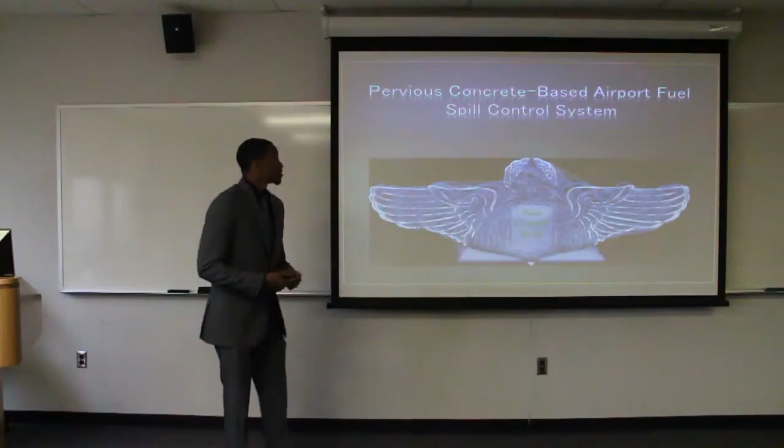Good afternoon, everyone. We're Team Greenberg, and we designed a pervious concrete-based airport fuel spill control system.

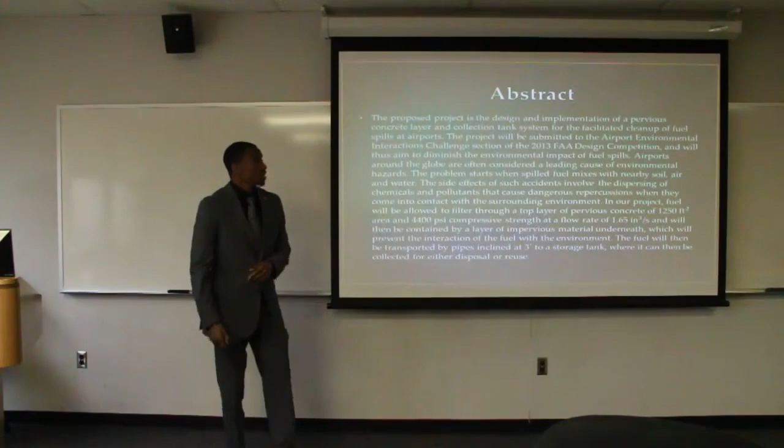We're motivated to do this project by a couple of things. Fuel spills are a major concern at airports because fuel is highly dangerous to the environment, and there are hazards when you think about seepage through concrete. If fuel gets into the water, it can be dangerous to your drinking supply. Fuel is also highly flammable, so it can explode.

Our project contains the fuel in a safe and economical manner, and our goal is to increase the safety of the passengers and also reduce delays.

Before we start designing, we had to think about a couple things. The strength of our concrete is based off the load of the plane. Depending on the load, we get the strength. Our mix also depends on the strength we need, and using the strength in the mix, we begin our design.

After design, we begin testing. We have to test for compression strength and permeability. If those numbers are good, we go right into completion and implementation. But if they're bad, they have to go through the system again until we get the numbers we need.

Also, for our pipe design, we needed materials that were strong enough for our design but also environmentally friendly. And we needed the pipes to be big enough to handle the flow coming through our system.

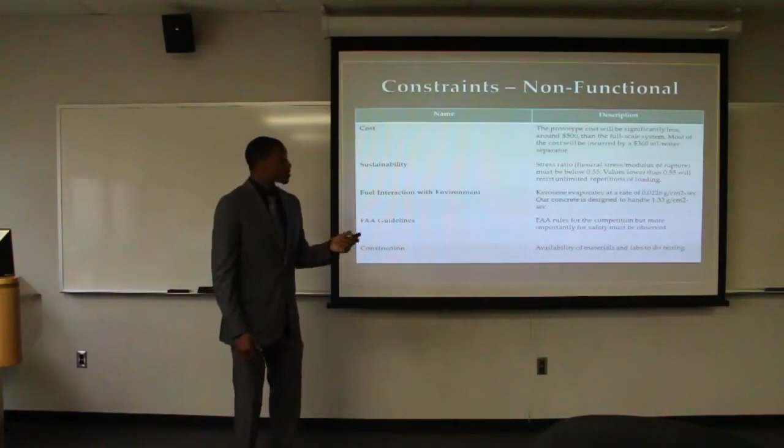We followed the FAA guidelines. In construction, we just used materials available to us, and we got into the lab when we could, though sometimes that was time restricted.

There were a lot of risks we ran into designing this project: evaporation, seepage, and absorption, like I said before. If fuel gets into the environment, it becomes very dangerous on many levels, so we looked to avoid that.

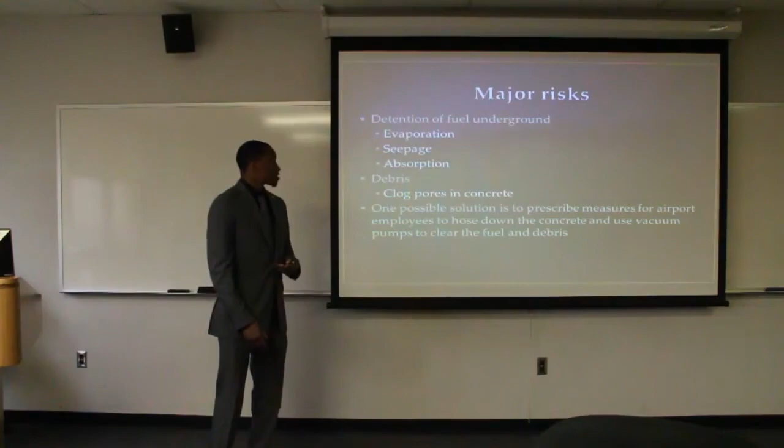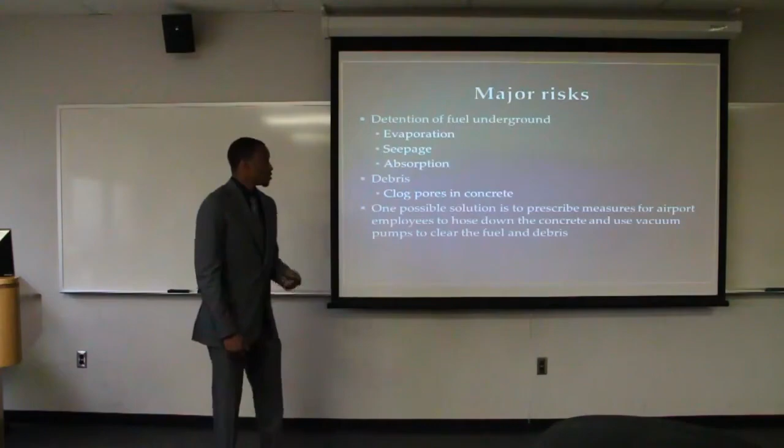Debris is also a concern since the airport is outside — there's going to be leaves and dirt, so it's not easy to keep it completely clean. But we had a method to prescribe to the airports: maybe the people who clean the grounds could hose down the concrete and use vacuum pumps to clear the fuel, making sure our concrete isn't clogged up.

Here it is, this is basically it right here. The concrete here, as you can see, is this tray. It's 50 by 25, and this is the first concrete layer, 12 inches thick.

Below the concrete is the aggregate, which is where the liquid will run through, at a 5-degree slope. It all meets right here at the orifice, the beginning of our pipe system, and the orifice runs the whole length of the concrete. After it goes through the orifice, it comes out and the pipe goes down 100 feet at a 1 degree slope, so that's a 1 foot drop right there. That goes into our oil water separator, where the oil is separated from the water.

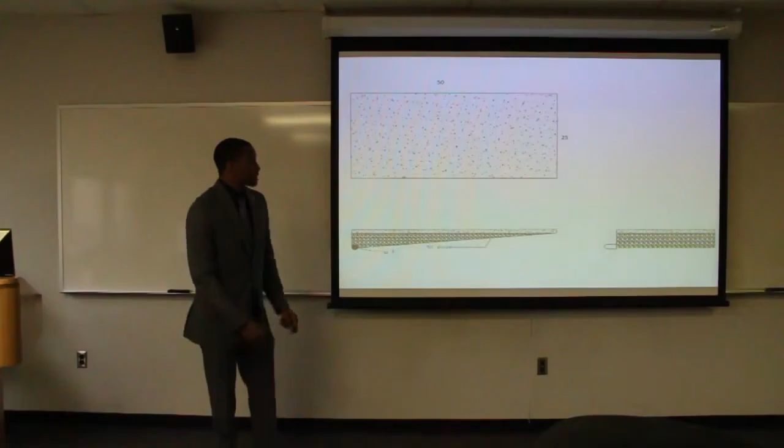There's basic numbers for the weights of the things that we use for our project. We got a total unit weight of 2,185.2, which is a little lower than the average, which is around 2,400. But we had to take into consideration the amount of air holes that we have for the permeability, so we lose some type of weight.

Based upon the AC ratio and the water content, the AC ratio needed to be between about 4 or 5, and the water content around 30%. So based off those numbers, we get a permeability of 27.04 centimeters cubed per second, which is fairly good for the goals that we needed.

Now, to design the slab, we had to use the 53,000 maximum takeoff weight. We also used 150 PCI for our K, our spring value for the soil, which is the average found around that area at the Philadelphia Airport.

Now, to find our working stress, we used the modulus of rupture over the safety factor. And finding our modulus of rupture, we used our K prime, which is 8, the usual number at airports, and we multiplied that by the square root of our compressive strength, which is 4,400, and we got 530.66.

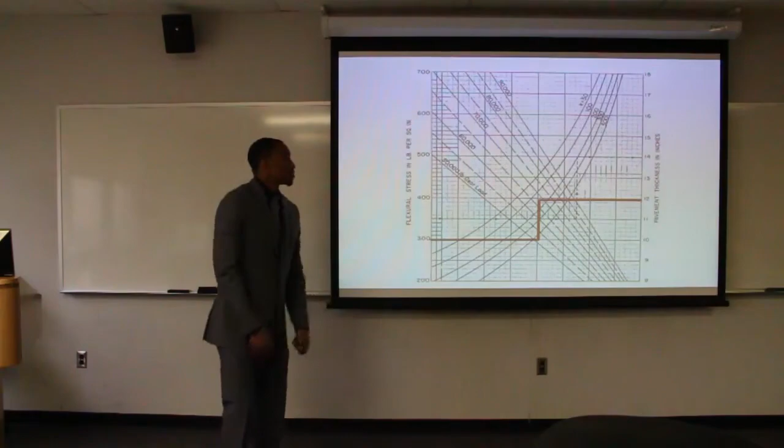So that works out. Here's just a graph of the numbers. We start here at 300, which is our flexural strength. We go horizontally till we run into our 53,000 pound gear load, back up vertically to our K, 150, so that's between 100 and 200, then back horizontally to the 12-inch thickness of our pavement.

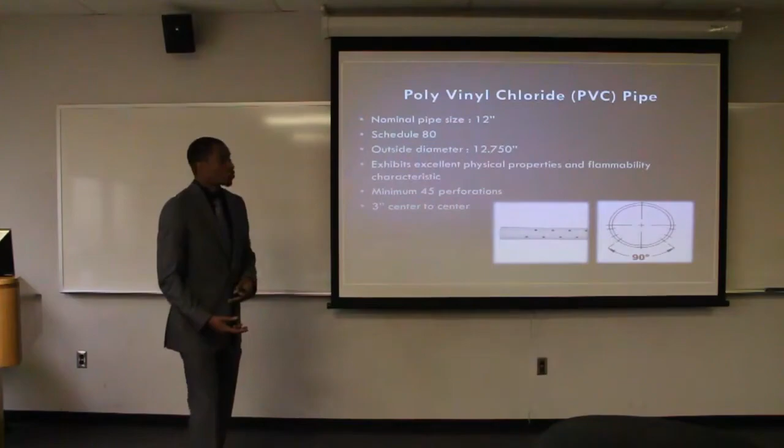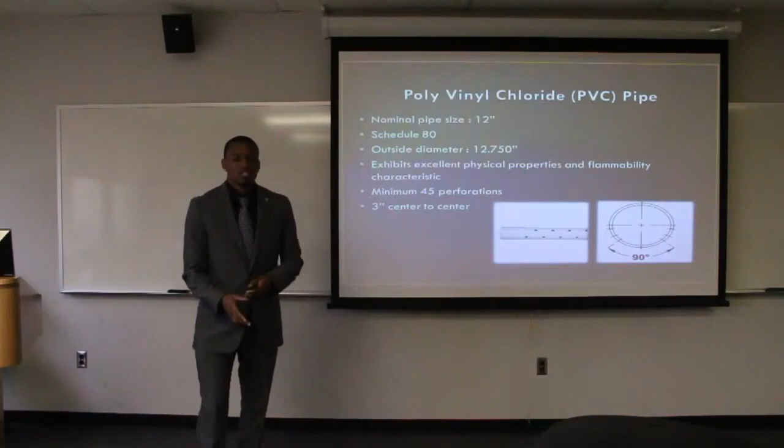Now for our pipe system, we use PVC pipes because they have really good physical properties. They're really strong, and the flammability characteristics are pretty good, and the walls are pretty thick. So we calculated that we need a minimum of 45 perforations to get the flow rate that we needed. What we did is we used 2 sets of perforations, 90 degrees apart, and 3 inches from center to center.

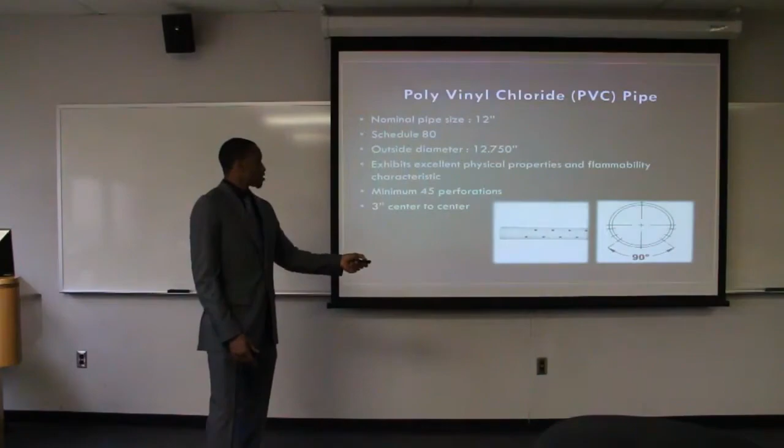Now, calculating our flow rate, we needed our outflow rate, the flow rate of our water, to be greater than the inflow that the pipe was going to handle. So we used a number of equations, Bernoulli's, the Darcy-Weisbach equation, and calculated our velocity for the water here, using a number of heights.

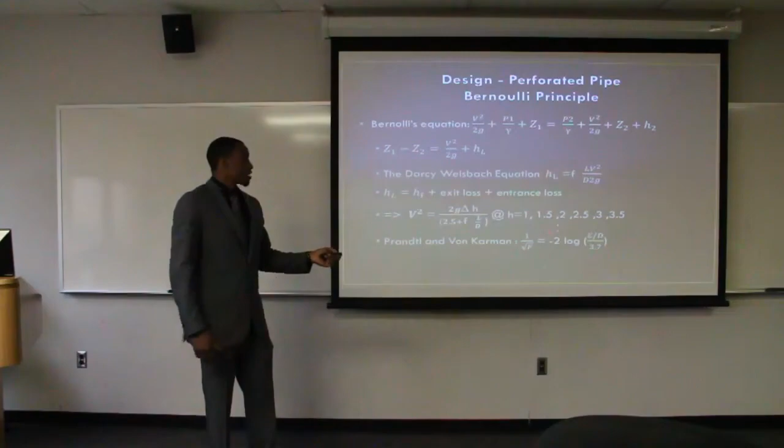Now we start at 1, because that's the height of the total pipe system. We have the 100-foot pipe at the 1 degree slope, at the 1% slope, so that's 1 foot height, so we're beginning at the 1 that's already covered. And then we go from every height up there, 1.5, 2, 2.5, 3, and 3.5, and that's the height of the aggregate, so that's the maximum the water will reach in the whole system. We're basically at the very most that it can handle, but to get these numbers, we have to find our F here.

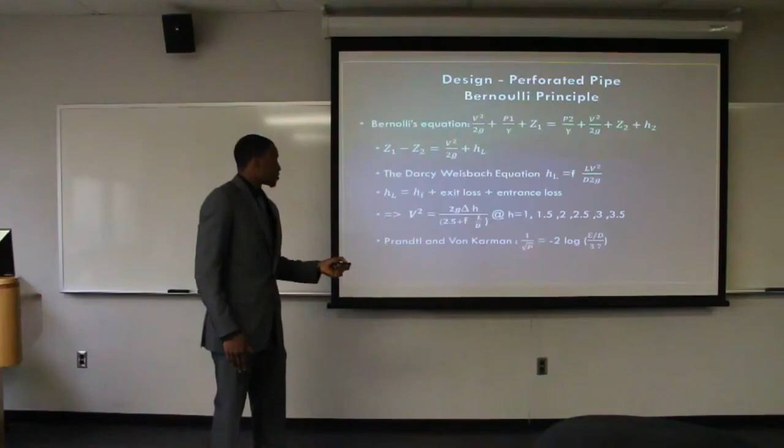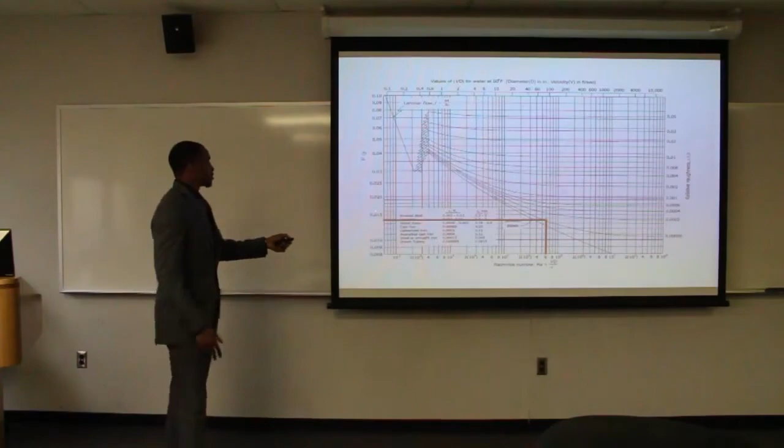Now to find F, we use Moody's diagram. You have to end up over here. But we begin with our Reynolds number, which we calculate using the VD over nu equation, and we get 6 times 10 to the 6th power. Then we go up to our relative roughness, which we find to be 0.00005. Back over to the left, and we find out our F is 0.014.

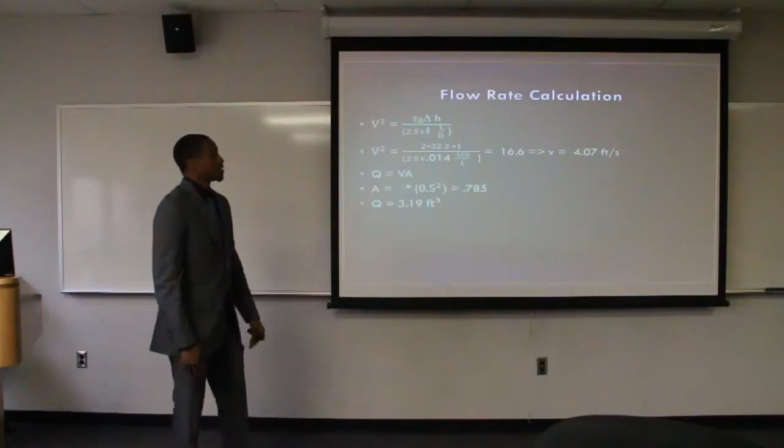Now we plug our F back into the equation, and we get a velocity of 4.07 feet per second. Multiply that by the area, which is 0.785, and we get a flow rate of 3.19 feet cubed per second. So we have a flow rate that we need to satisfy.

Now we need to make sure that our orifice can handle all the flow. So we calculate our flow rate for our orifice, using our CD and our A, which is our coefficient of discharge and our area. We find that with approximately 45 perforations, we can handle 3.34 feet cubed per second, which is higher than the 3.19. So we've met our goals.

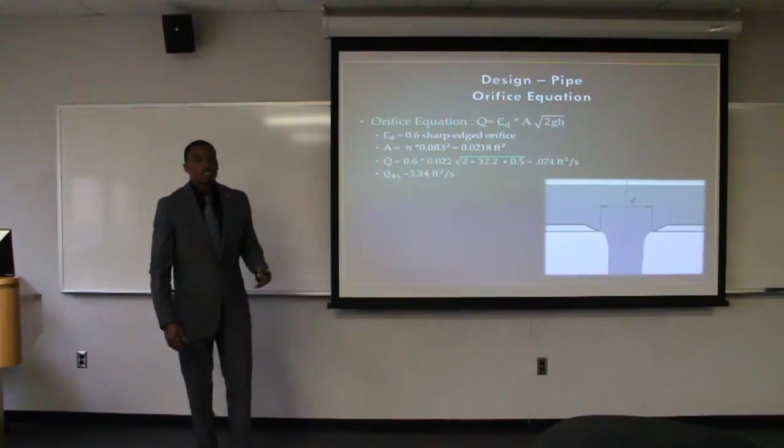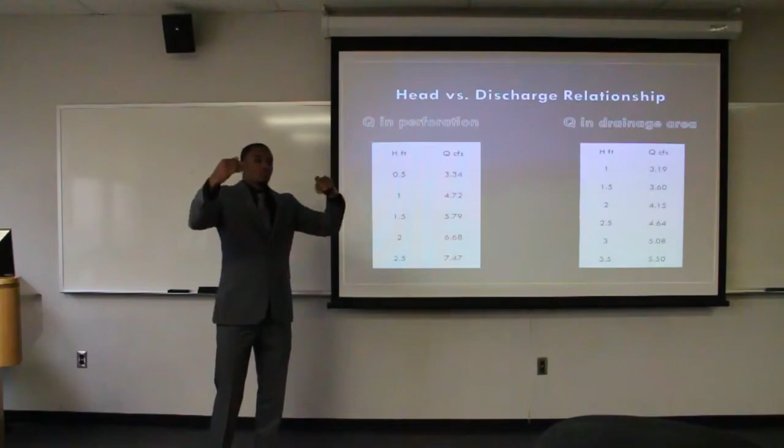This is just to describe the relationship between the two. Now, the Q in, the flow in the perforation, is strictly the flow of the system into the pipe system - the flow into the beginning of the pipe. So we start at 0.5 from where the pipe begins before it flows down to the oil water separator, and so we get from every height that flow. So this is all the water that would be in the aggregate.

Now the Q in the drainage area is the water in the aggregate plus the water flowing down through the pipe. So we begin at 1 again to come up to that 1 foot height of the pipe system. And you can see here clearly that the Q in the perforation, which is the flow from the aggregate into the pipe system, will always be higher than the Q in the drainage area.

Now for our concrete, we had a test - we had many tests actually. For our 7th-day test, we got a mean strength of 3,086.67 psi. So we use that number to calculate what our expected strength on the 28th day would be, which is 4,387.48. And we're looking for 4,400, so that's around it.

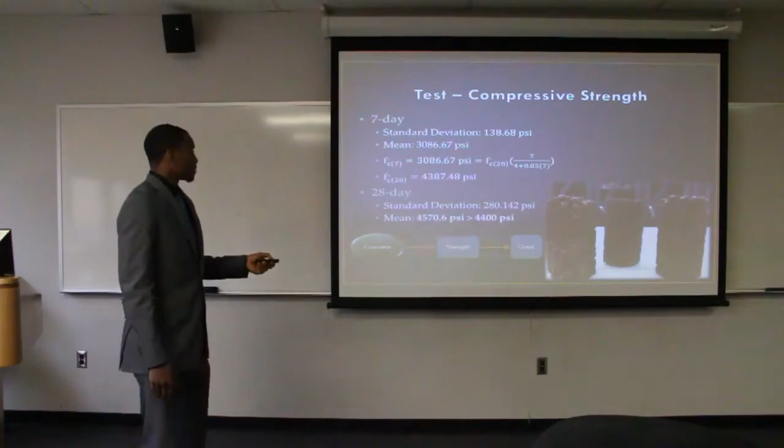Now, well, this is great pouring technique, just want to point that out. That's great. Permeability aggregate here - so we're testing for the permeability of our aggregate.

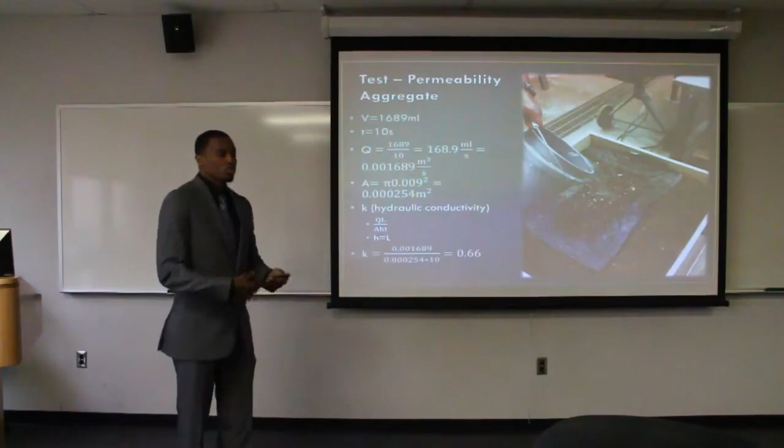So we need to find our K, which is our hydraulic conductivity, which is basically how much water flows through a material. So we find our K to be 0.66, which is good.

Now, testing for absorption. This was also important because we wanted to make sure that things weren't getting absorbed in our system. We want to make sure that everything flows through and finds its way into the oil water separator. So we didn't want anything to be absorbed in the aggregate, like the fuel or the water, to possibly have it go into the soil or go into the air. So we wanted to avoid as much evaporation or absorption as possible.

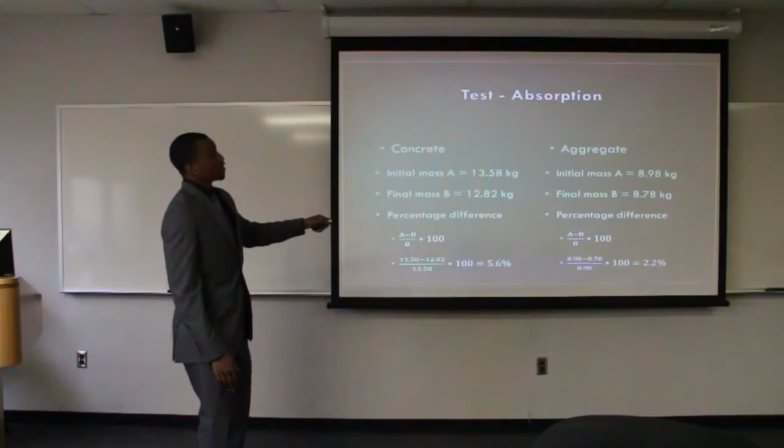So for our concrete, we get a 5.6% absorption rate, and for our aggregate, we get 2.2%. Those are fairly low percentages, so we're good on the absorption part.

Now we had to test the system. Once you make a system and it doesn't work, we've done all that work for nothing. So we had to test the whole system to make sure that the water that ran through our system was drinkable and usable. What we did here is we used 2 liters of tap water mixed with about 300 milliliters of alcoholic solution, which is basically rubbing alcohol.

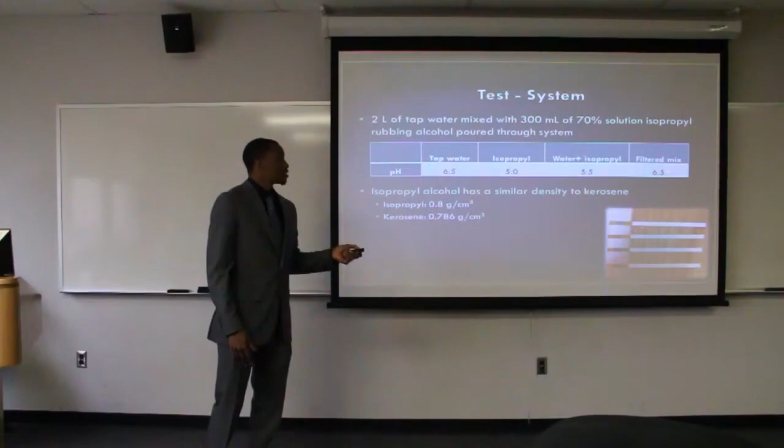We found that the pH of the tap water is 6.5. The pH of the isopropyl, which is the alcohol, is 5.0. We even mixed both of them and found the pH of that, which is 5.5. After running our fluid through our whole system, we get 6.5 pH for our filtered water, which is the same as tap water, which means you can drink that. I don't drink tap water, but if you want to drink that, you can drink it. So it's drinkable.

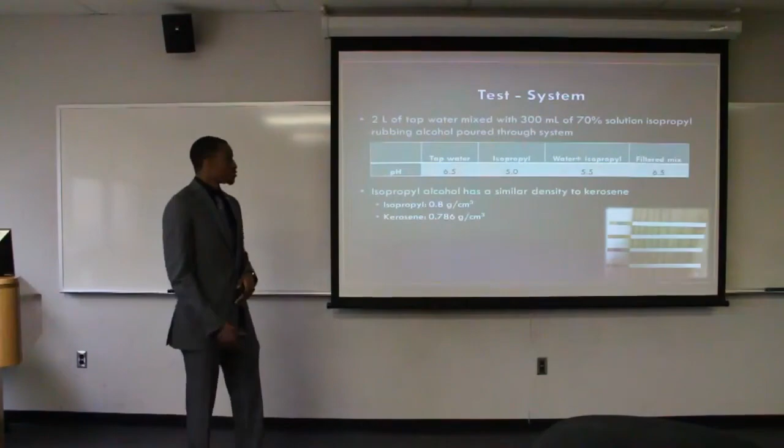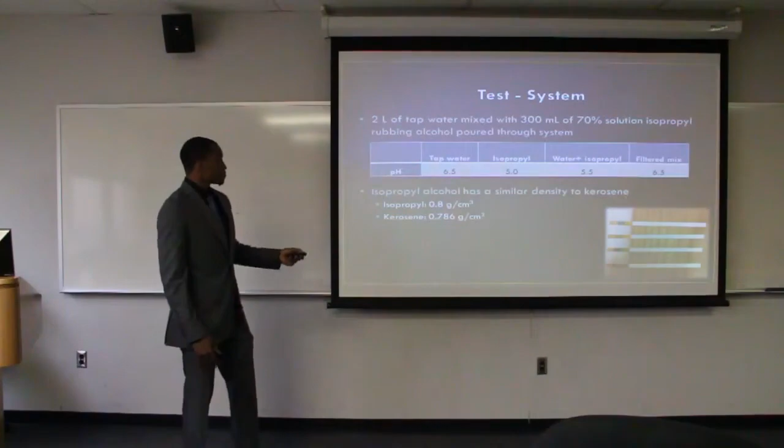Also, the testing is based off density. So we had to use something that was very similar to kerosene, which is the main component of the fuel at the airports. So this is 0.7, 0.8, right around there. So pretty good.

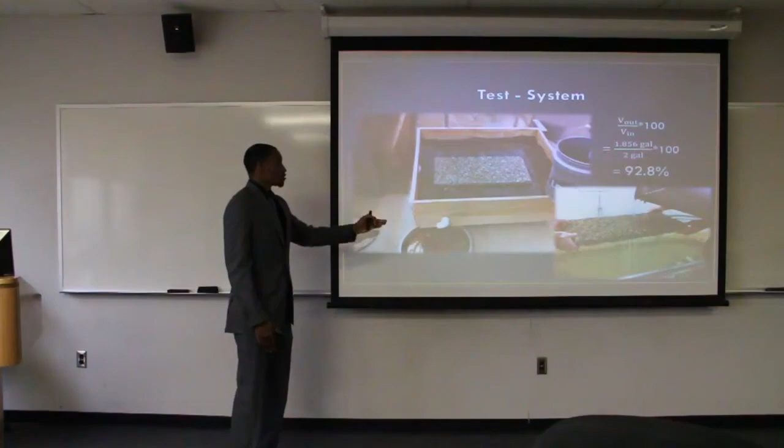We ran a number of tests and we got an average of 92.8% retained from running it through the system. That's a fairly high percentage. The 7.2% could be due to water that's left over, or it could be the minimum absorption of the aggregate or even the concrete.

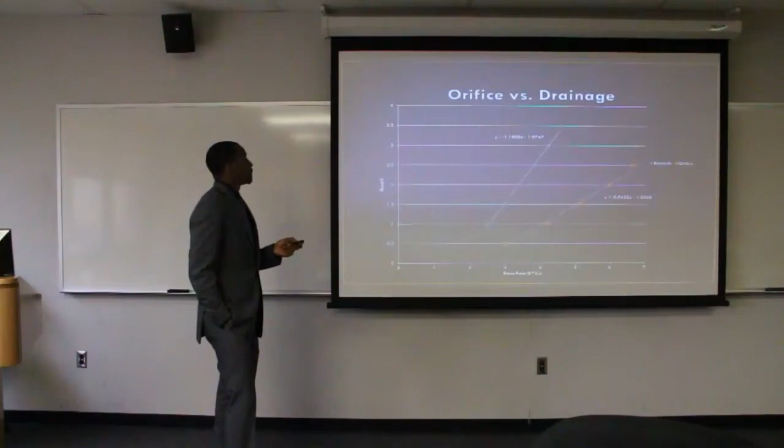Can you help me understand something a little bit? When you were talking about the safety factor and modulus of rupture, can you pull that up and just explain that a little bit? I can do that, I can certainly do that. That's it? No, that's not it. This is it.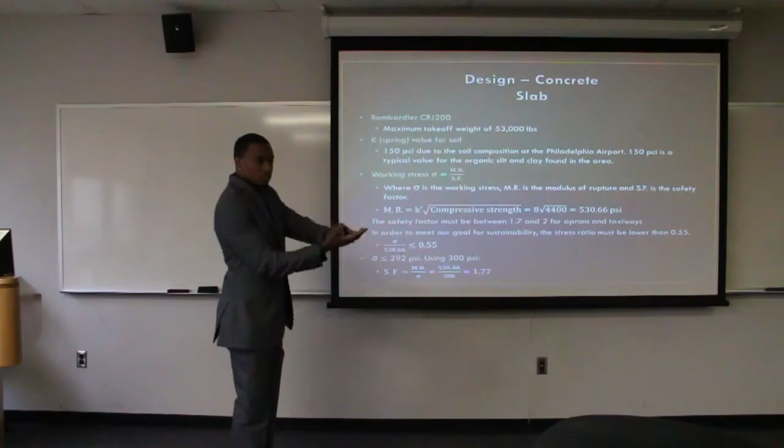I guess what is spring value? What does that mean? The spring value, that's how much spring of the soil. Explain, I don't understand that. What do you mean? It's like the compactness of the soil, like soil's compact or it's loose. So it's got a value of 150, what's PCI? It's pounds per cubic inch? Yes, PCI, pounds per cubic inch.

So I don't understand how that relates to springiness or flexibility or compaction. It's the pounds per cubic inch, which is how much pressure it can withstand without... of course, okay. So you've got your working stress, which is the modulus of rupture over the safety factor. Right, you calculate a modulus of rupture as what's K prime?

Spring value is the prime. That's the 8, the 8 that we use. What does that, I don't know, what's the definition of K prime? It's the prime of the spring value. So how do you go from 150 to 8? Because that's the number that we had used for the equation. Okay, do you know where that number came from? Yeah, that's the number that's found at most airports. We found it in the book.

It's in the references. So you got your modulus of rupture, and you decided that the 0.55, what is that value again? That's our stress ratio, can't be any higher than 0.55. It's one of our constraints.

I guess this is what I'm confusing on. You say the stress ratio, it says working stress sigma is equal to MR over SF. And then you say sigma over 530 has to be less than 0.55. No, that's the ratio. Right, so is sigma in the second equation the same as the working stress up here? Is that sigma right there? Right here. Is that the same as the sigma above?

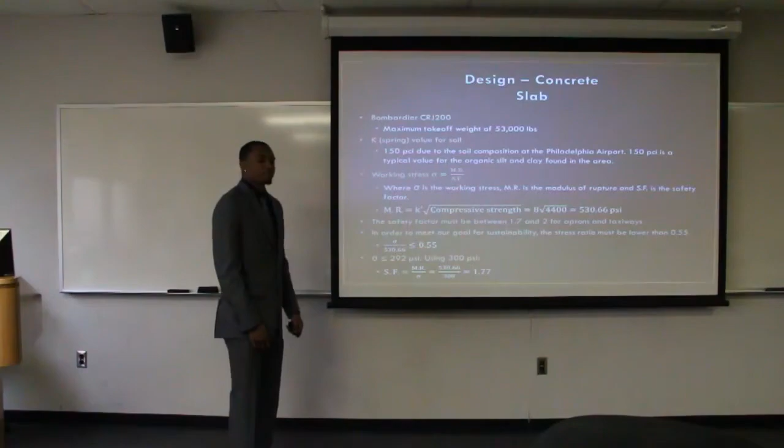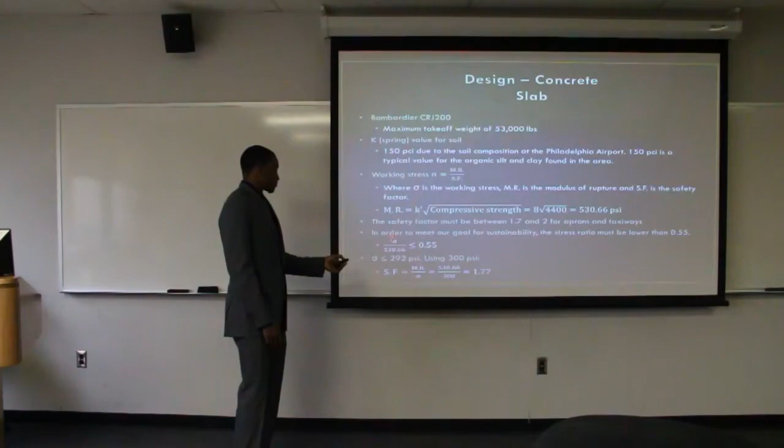Other questions? All right. All right. Thank you.